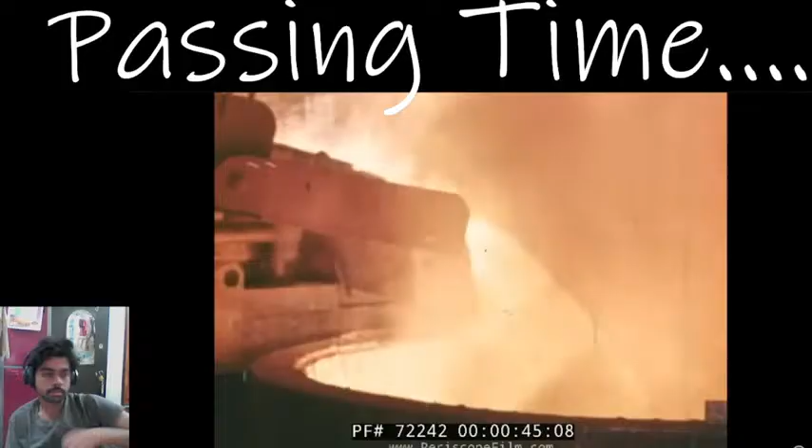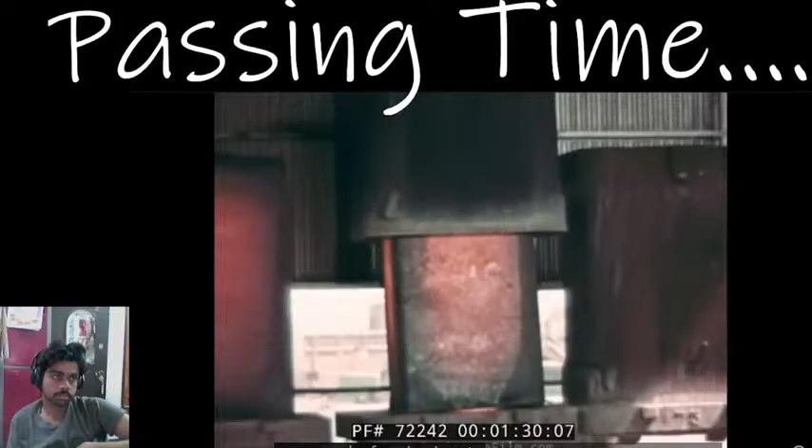The world's output of metal is more than 350 million tons a year. Almost all of it goes through a forming process. Metal forming means pressing, squeezing, or rolling metal into shape, as opposed to machining it. Forming depends on a basic property of metals, plasticity, the ability to change shape under pressure. By forming, ingots are changed into usable shapes. At the same time, the internal structure of the metal is altered.

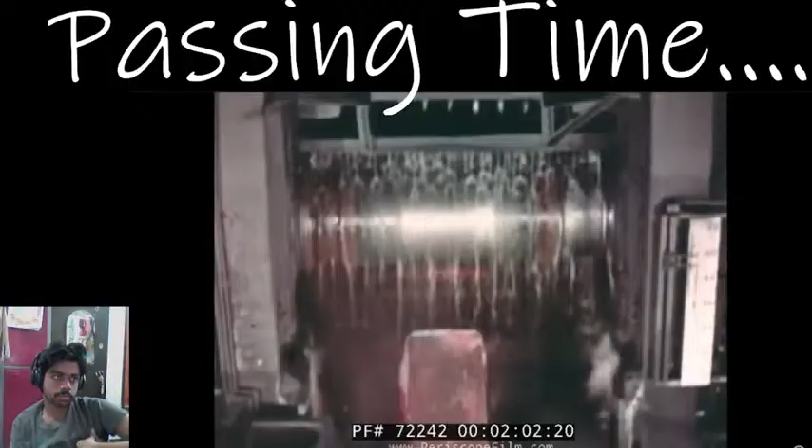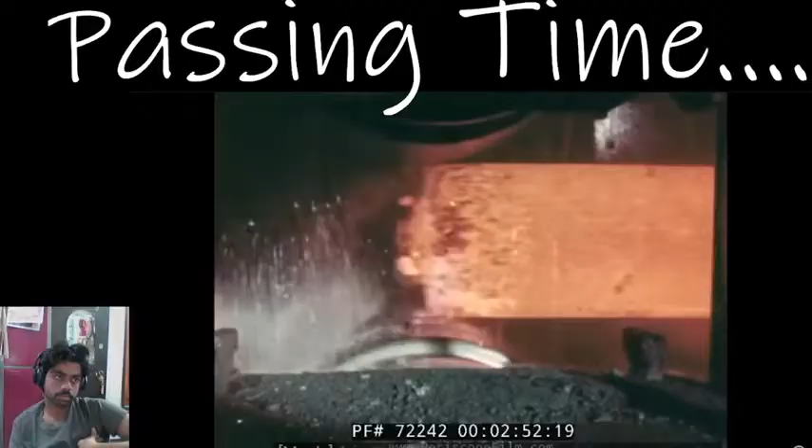As the rolls bite into the steel, the crystals are all the time breaking down and forming again, making the metal tougher and more resistant to failure. The slabbing mill is operated from a control room, the pulpit perched astride the rolling line. The mill is in continuous operation day and night. The chief operator and his assistants work 8-hour shifts. The operator gauges the thickness of the slab to a fraction of an inch. He sets the bite made by the work rolls. His controls direct the rams which manipulate 7,000 tons of steel every day.

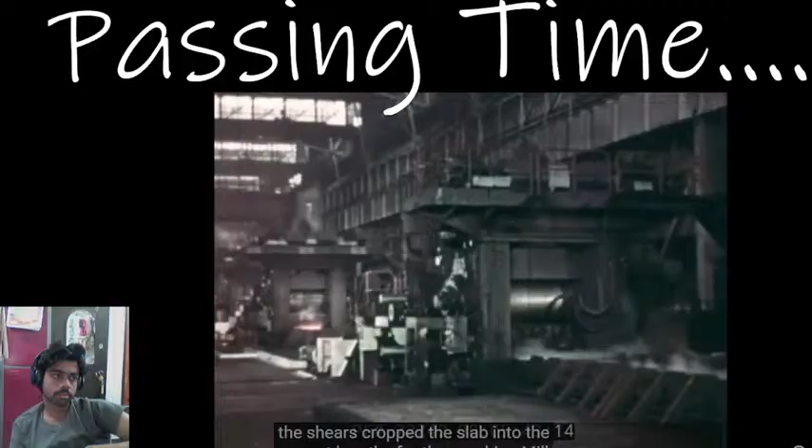When the ingot has been rolled down to a slab 8 inches thick, it is sent to the shears. The shears crop the slab into the correct lengths for the roughing mill, a group of 4-high mill stands in series.

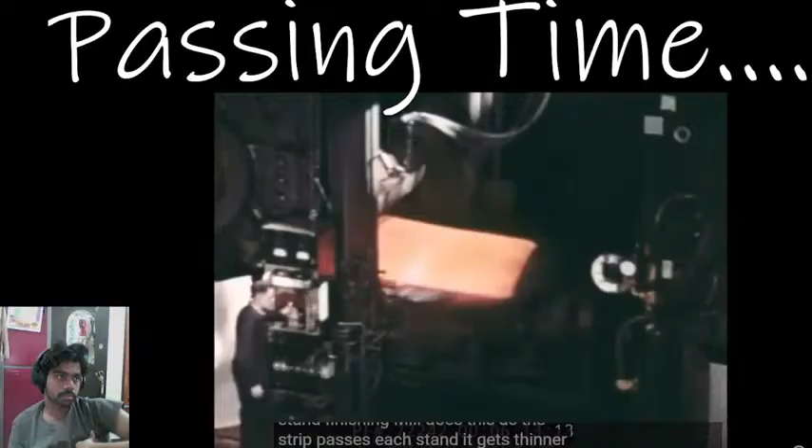The slab is now under an inch thick and is ready for rolling into strip. The 6-stand finishing mill does this. As the strip passes each stand, it gets thinner. It leaves the mill at 2,000 feet per minute, over 20 miles per hour. The strip hurtles down the runout table, cooled by jets of water as it goes.

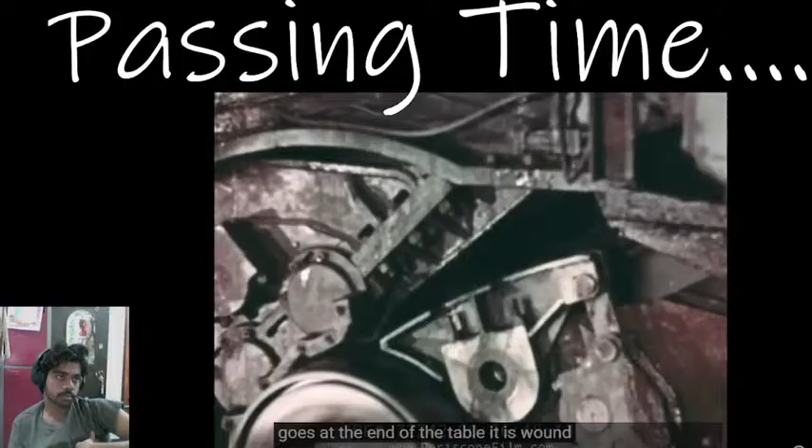At the end of the table, it is wound on a coiler. While one end is coiling, 400 feet away, the other end is still being reduced.

Rolling has given the strip a fine, regular grain structure. Its properties are better balanced. It is tougher now and more ductile. Such hot-rolled strip has many uses. For example, steel pipe for household gas and water is made from it.

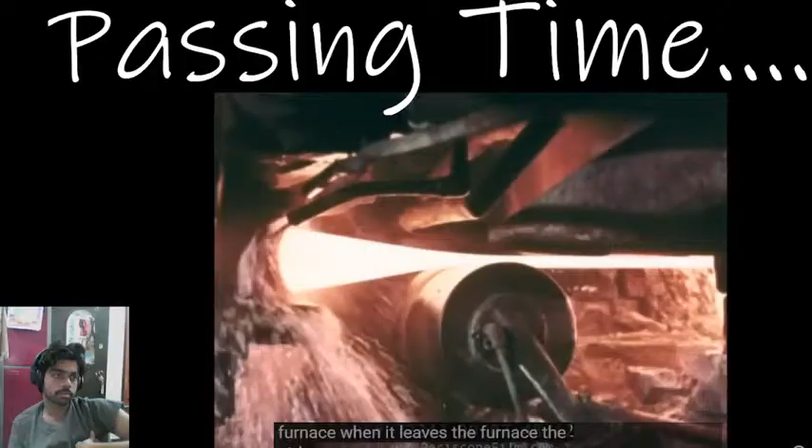Here it is being reheated in a tunnel furnace. When it leaves the furnace, the strip is bent into a tube by forming rolls. Further rolls press the edges of the tube tightly together for butt welding. The tube is cut into lengths by a flying saw, and the sections shoot away to a cooling rack.

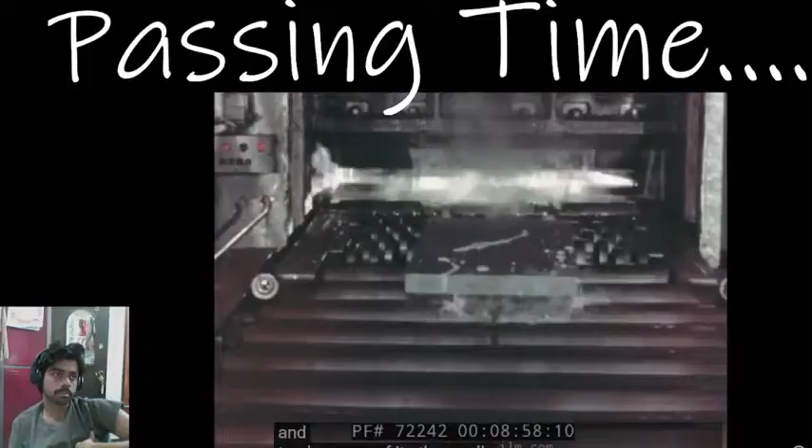As with steel, most non-ferrous metals are hot rolled. This is a slab of copper, just off red heat, and covered with a thin layer of scale. The slab passes between the bottom and middle rolls, and comes back between the middle and top. Because of its 3 rolls, this is called a 3-high mill. As a rule, hot working does not need lubricants because the metal scale prevents sticking. The work rolls are cooled by water.

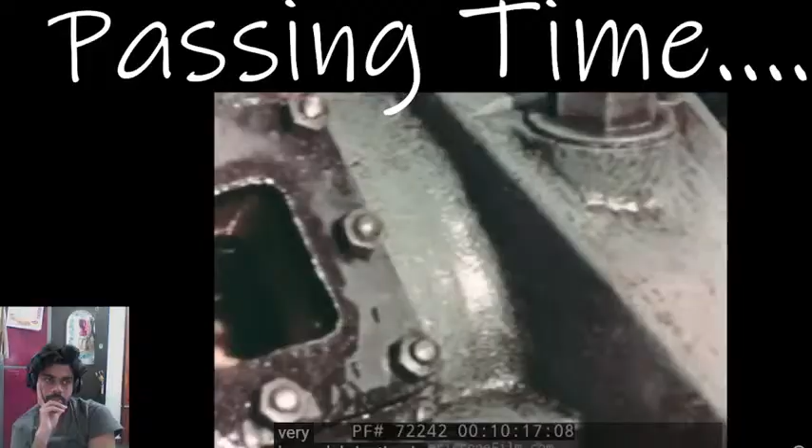In all metal forming processes, the loading on bearings and gears is very heavy. Lubrication is critical. Rolling mills are generally lubricated by oil circulating in a large system complete with coolers, filters, and storage tanks.

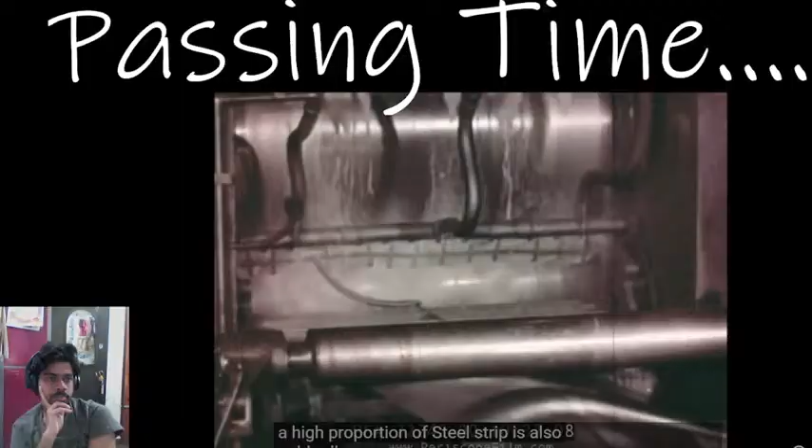A high proportion of steel strip is also cold rolled, using a dilute oil emulsion. Here, strip from the hot mill is passing forward through 3 mill stands in succession to be reduced to 1/30th of an inch, a common thickness for car bodies.

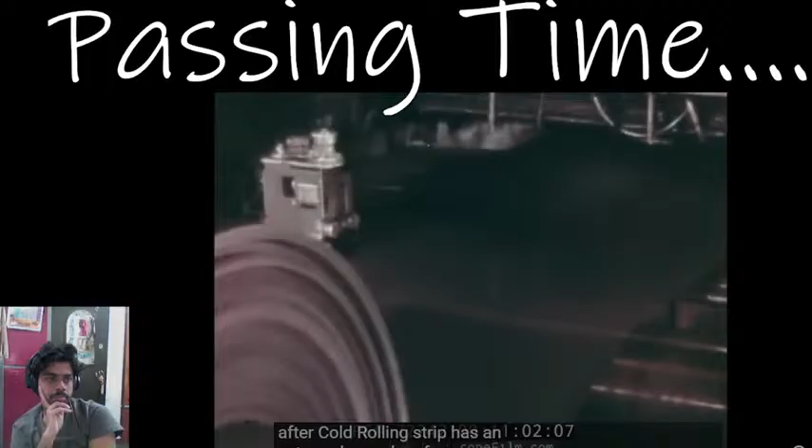After cold rolling, strip has an extremely good surface finish. But the regular grain structure it acquired in hot working has disappeared. The grains have been lengthened in the direction of rolling. The metal has become harder and stronger, but less ductile. Sometimes this is satisfactory, but sometimes the softness and ductility must be restored. This is done by annealing.

In one process, the metal is heated inside a container filled with an inert gas to prevent oxidation. This is known as bright annealing. Here the heating is done by gas or oil, and the whole process lasts for several hours.

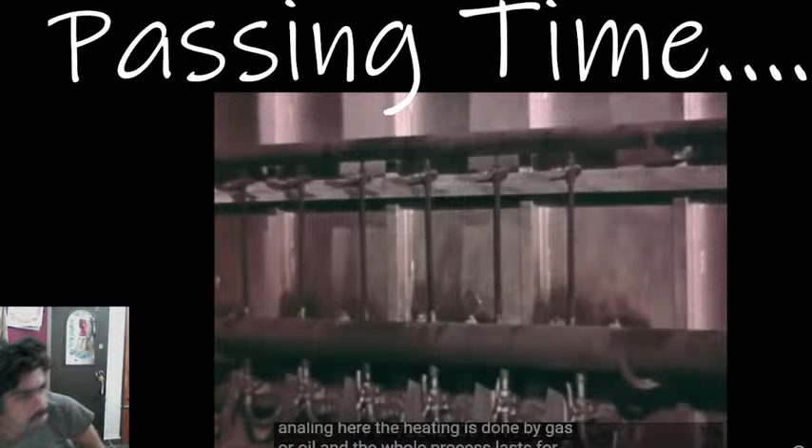Sometimes the softness and ductility must be restored. This is done by annealing. In one process, the metal is heated inside a container filled with an inert gas to prevent oxidation. This is known as bright annealing. Here the heating is done by gas or oil, and the whole process lasts for several hours.

Annealing recrystallizes the metal and restores its regular grain structure. Cold rolling followed by bright annealing gives much the same result as hot rolling, but with a better surface finish. After annealing, the strip can be worked more easily and is less liable to crack. In this tube mill, an oil emulsion lubricates and cools the strip as it is formed up into a tube.

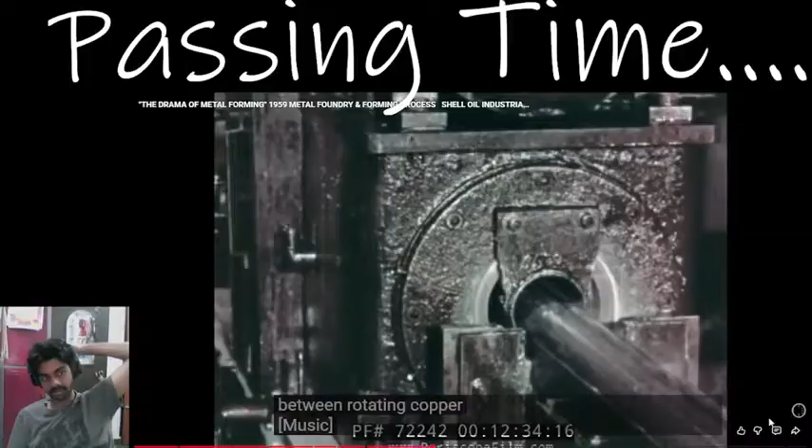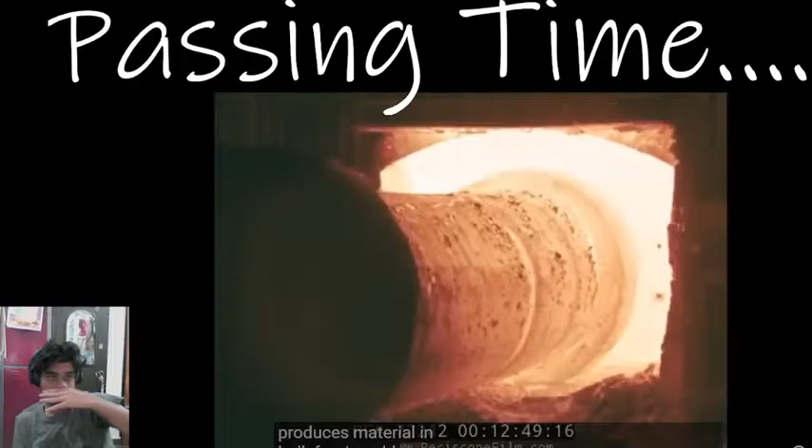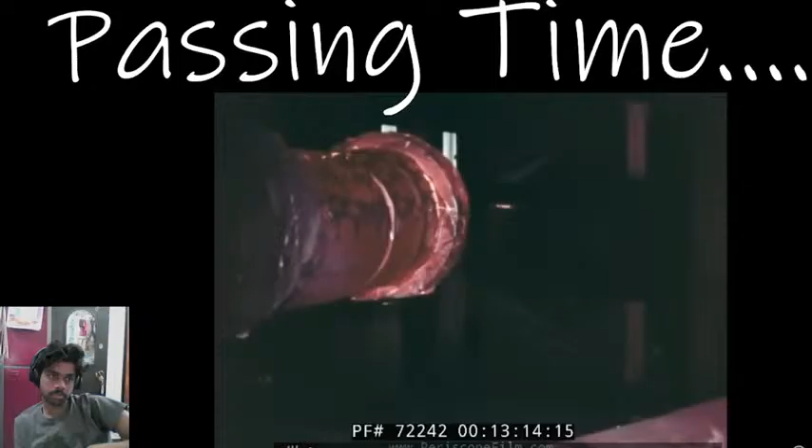Rolling, a continuous process, produces material in bulk. Forging, old as the blacksmith trade, remains unsurpassed for making individual parts, especially those of intricate shape or great size. By hammer or press, an almost finished article can be made directly from red-hot ingot or billet. This 170-ton mass of steel is to be forged into a turbo generator shaft. The 7,000-ton press squeezes the metal as much as 8 inches at a stroke.

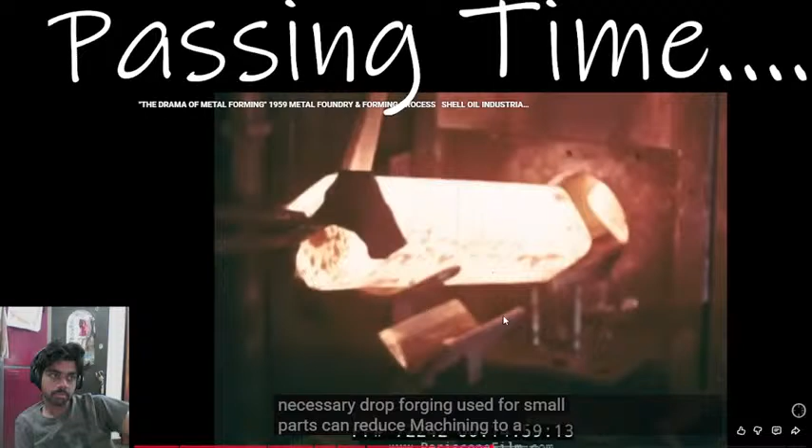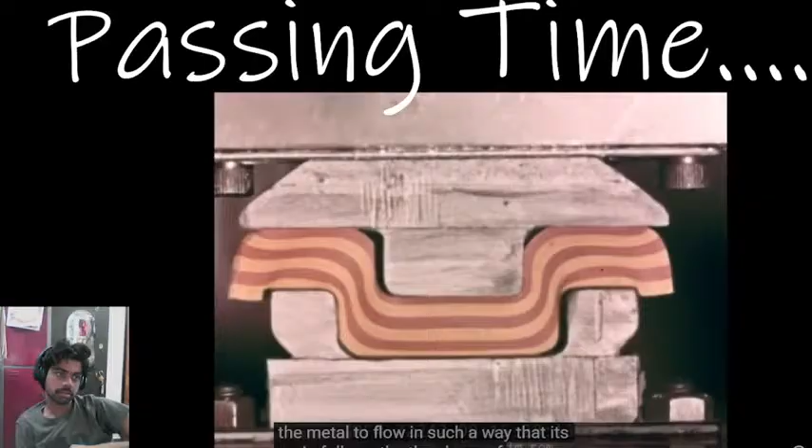The impact of the upper die causes the metal to flow in such a way that its grain follows the shape of the die. This gives the workpiece great toughness. After the roughing out, the crankshaft is put between finishing dies. Sawdust helps to prevent the metal sticking. When the flash has been cut off, the crankshaft will require very little machining. Fine and regular grain structure is an important asset of forgings. The forging of railway car wheels has been greatly speeded up in recent years by linking many forming processes into a continuous sequence.

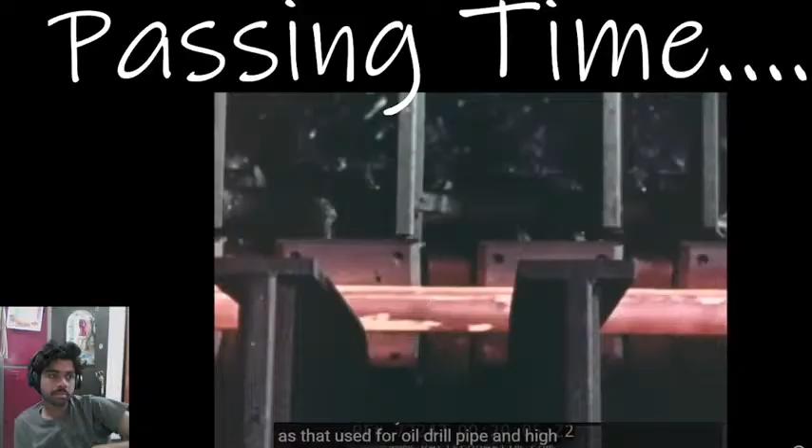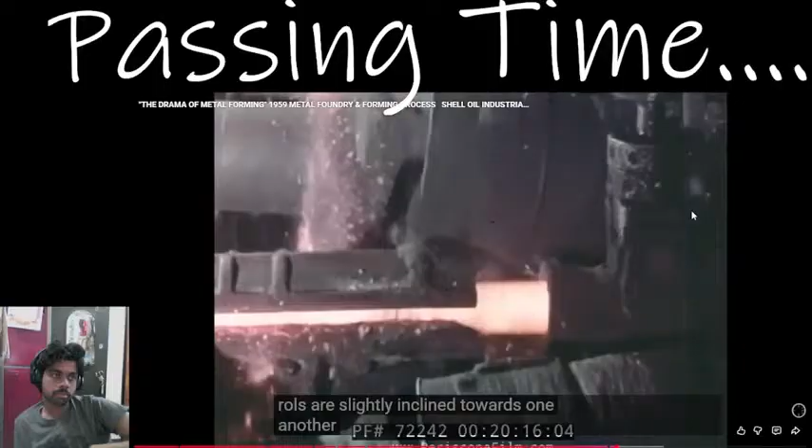In rotary piercing, the two piercing rolls are slightly inclined towards one another to break open the center of the ingot, which flows over the piercer held on a mandrel.

A cool piercer point is used for each ingot.

The piercer produces a thick-walled tube of medium length. This has to be elongated and its wall thickness reduced. This is done in the plug mill.

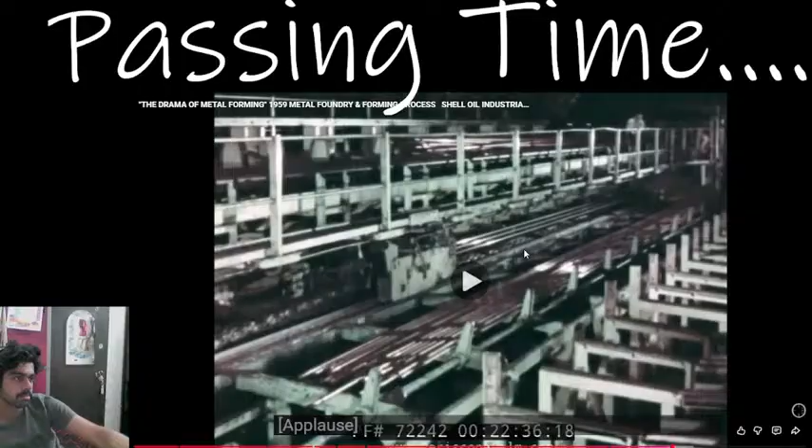For some small diameter tubes, the plug is not mounted on a mandrel, but is allowed to float in the tube.

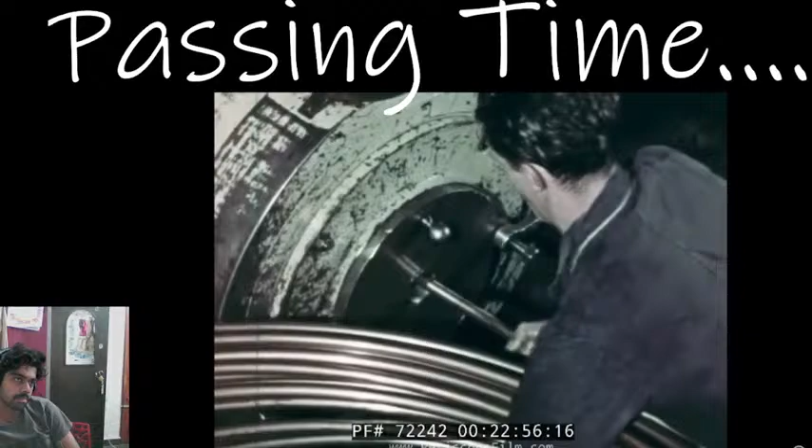The tube is pointed, or swaged, to allow it to pass through the die.

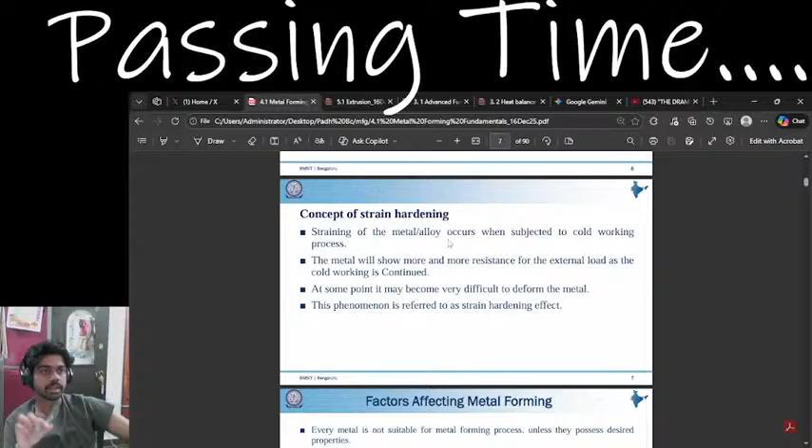Concept of strain hardening: straining of metals occurs when subject to cold working process. There are two types of working processes. The metal will show more and more resistance to the action of load as cold working continues. At some point, it may be very difficult to deform the metal. This phenomenon is referred to as the strain hardening effect.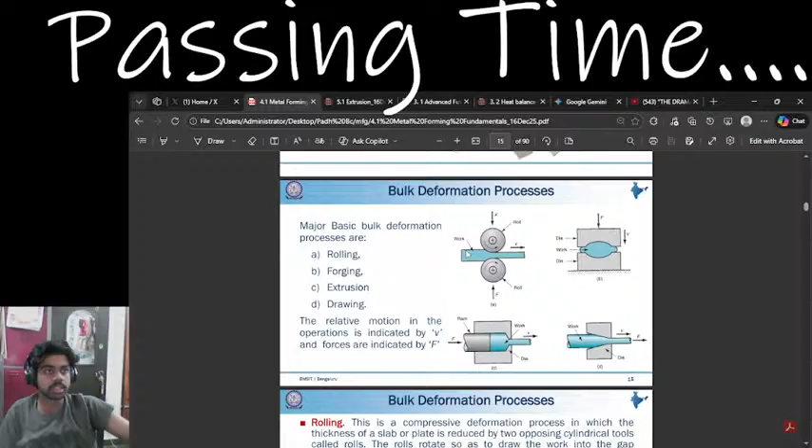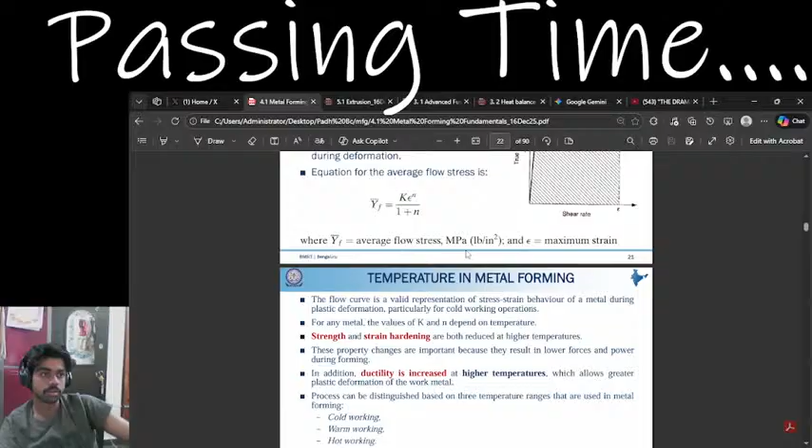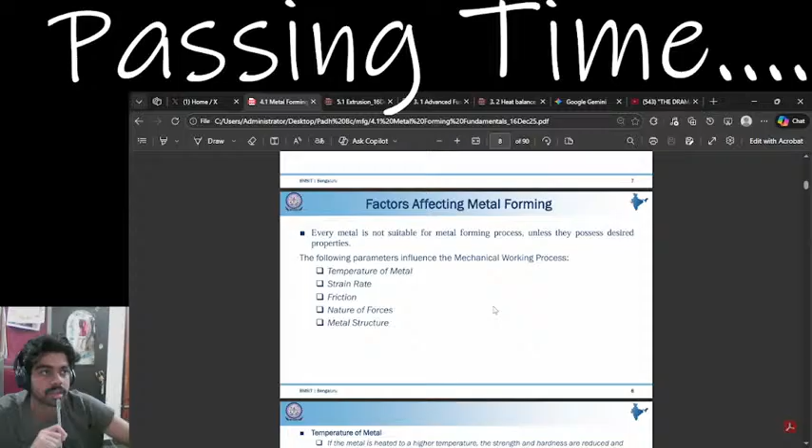Factors affecting metal forming: temperature, strain, strain rate, friction - nature of forces, metal structure. Every metal is not suitable for metal forming unless they possess desired properties. The following parameters influence the mechanical working processes. If the metal is heated to a higher temperature, the strength and hardness are reduced and the ductility is enhanced. The metal becomes softer and can be deformed easily.

Strain rate - strain rate is the rate at which strain is induced in the metal. As the strain rate increases, the metal becomes harder and flow stress increases. What is flow stress?

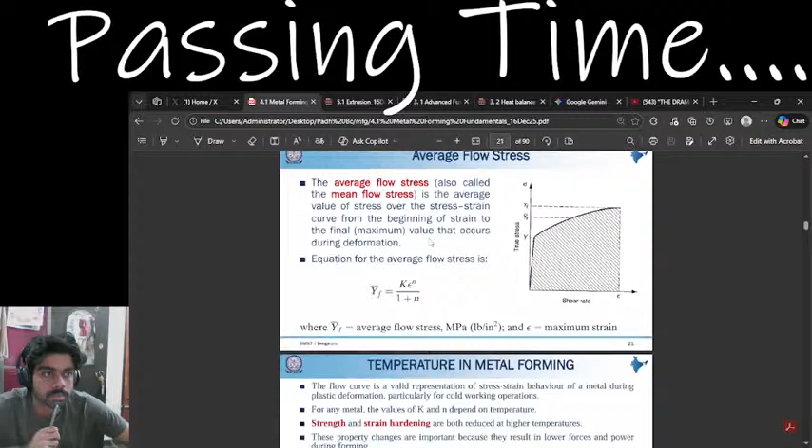Too many concepts to study. It's like a maze of things. Factors affecting metal forming.

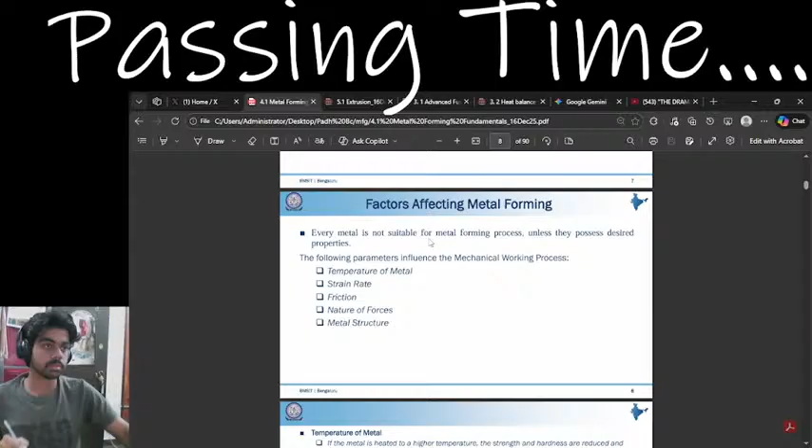Temperature of the metal. If the metal is heated to high temperature,

lower hardness, lower strength.

Stress and strain rate. Strain rate is the rate at which strain is induced in the metal. As strain rate increases, the metal becomes harder and flow stress increases as the strain hardening in the metal increases. Strain hardening is a phenomena, as I already mentioned, where metal subjected to cold working process will show more resistance for the external load.

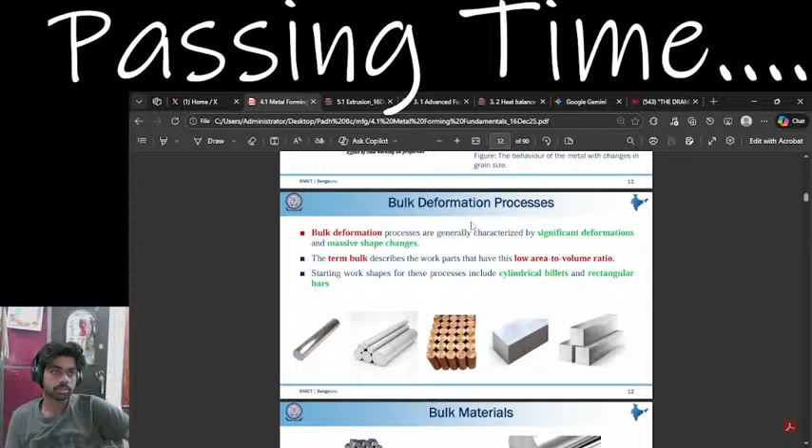Bulk deformation process is generally characterized by significant deformations and massive shape changes. The term bulk describes the work parts that have low area to volume ratio. Starting work shapes for these include cylindrical billets, rectangular bars, etc.

Bulk deformation, why is it always rolling?

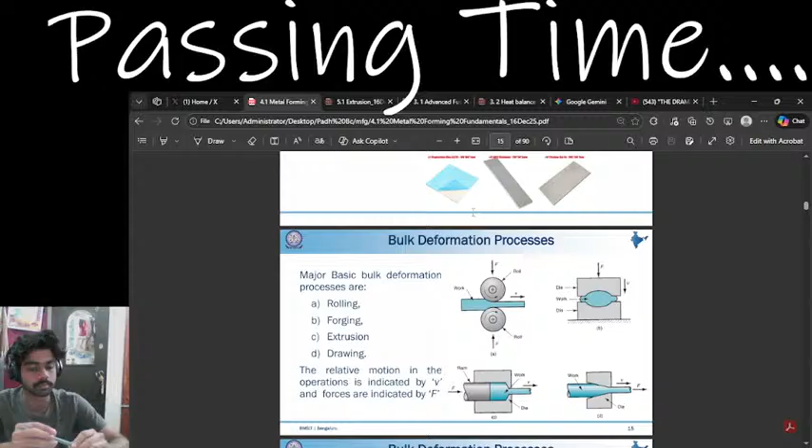Bulk deformation process, rolling. Rolling is a compressive process in which the thickness of the slab or plate is reduced by two opposing cylindrical tools called rolls. The rolls rotate so that

Opposing cylindrical. In forging, a workpiece is compressed between two opposing dies. Forging is traditionally a hot working process, but many types of forging are performed cold.

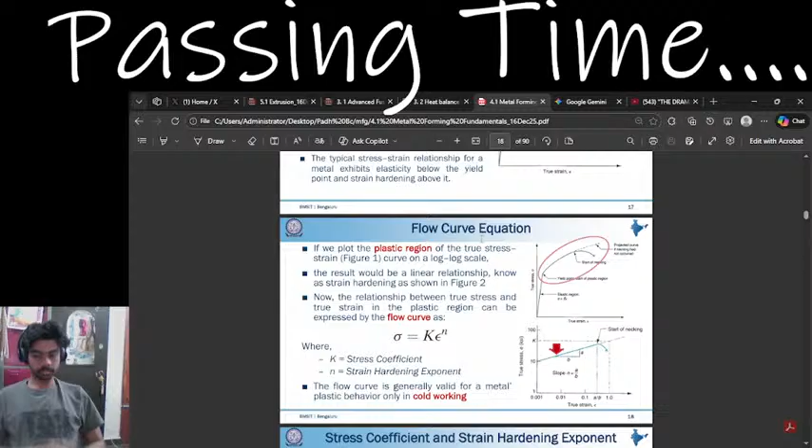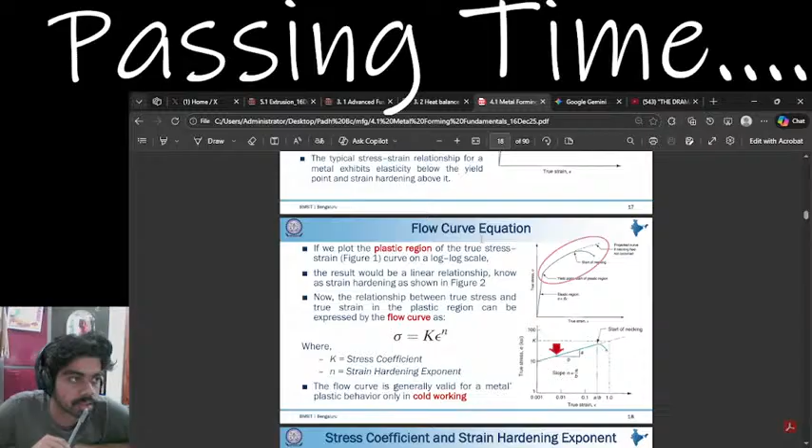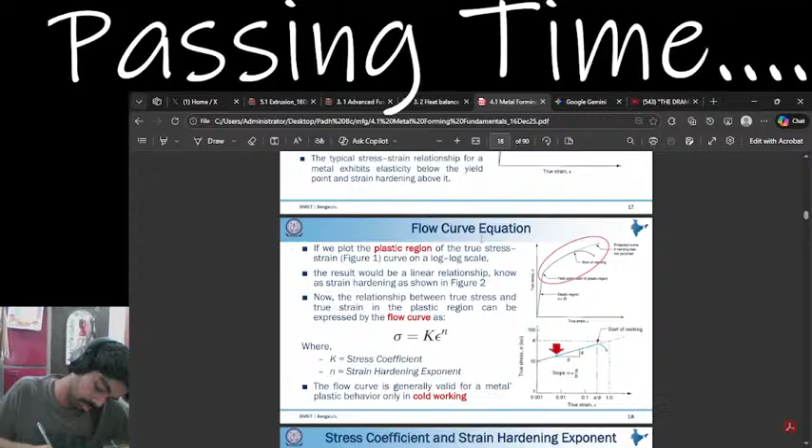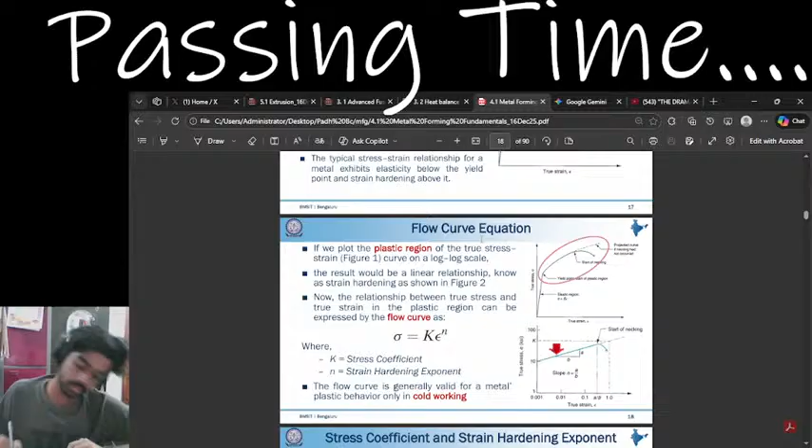now the relationship between true stress and true strain in the plastic region can be expressed in the following flow curve: sigma is equal to K epsilon to the power n. The flow curve is generally valid for metals in the plastic region only in cold working.

The reason the flow curve equation is generally valid only in cold working comes down to strain hardening. The equation mathematically describes strain hardening, also known as work hardening: as you deform the metal, the strength goes up. In cold working, that's exactly what happens. You bend a paper clip and it gets harder to bend further.

Hot working erases the hardening. In hot working, the metal behaves differently: self-healing recrystallization. Okay. Flow stress, average flow stress. Temperature in metal forming.

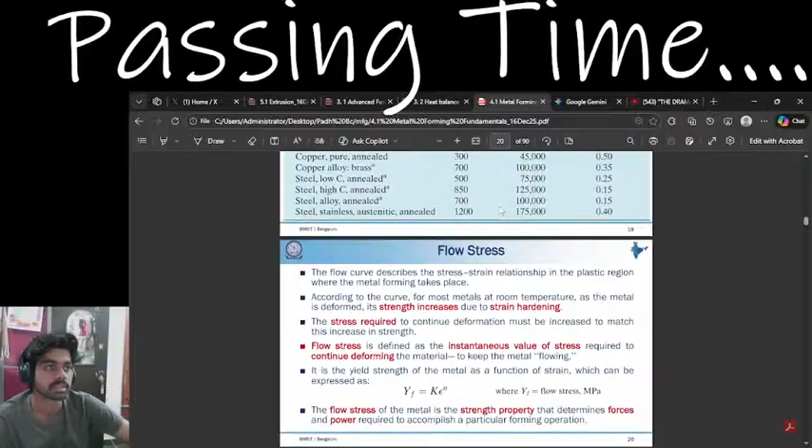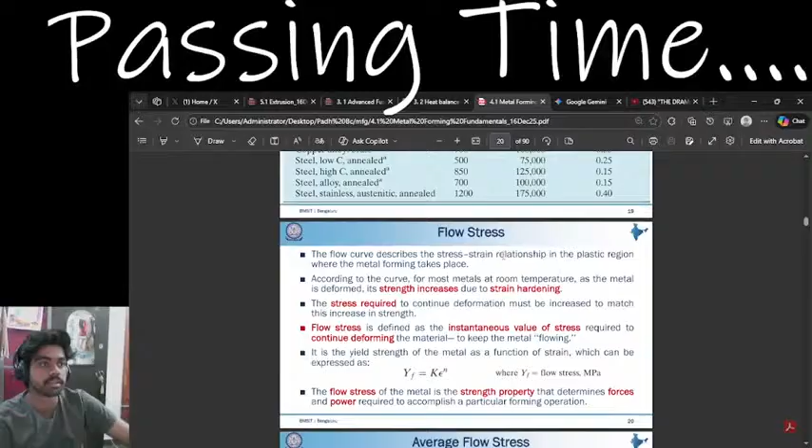Average flow stress is the average value of stress over the flow. The temperature at which the deformation takes place will be an important determining factor. The temperature is relatively low with respect to the melting point. Strain hardening is a phenomenon whereby a ductile material becomes harder and stronger as it is plastically deformed. Sometimes it's also called work hardening. Significant advantages of cold forming.

I welcome you all in this presentation related with the subject fundamentals of manufacturing processes. We have talked about the casting based processes, and today onwards we will be talking about the metal working processes for manufacturing of metallic components. So these are basically the plastic deformation based processes.

Means in this group of the processes, basically the desired size and the shape is achieved by applying the force to the metal or the bulk material, so that required deformation is achieved, and the plastic deformation of the material results in the shape which is desired.

Like say this is the strip, and if you want the strip of the smaller thickness but of the greater length, then by applying the processes like rolling or extrusion, this kind of shape can be changed, but this will primarily be based on the plastic deformation.

So for achieving the plastic deformation, we need to apply the force so that the stresses acting on the metal are greater than the yield stress of the metal which is being processed. So using the external forces, basically the metal is plastically deformed so that the desired size and shape is achieved in metal working based processes.

So here the common names of the processes which fall in this category are like rolling, forging, extrusion, drawing. So these are the most common plastic deformation based processes which are used for the different purposes. For example, the drawing is used for making the wires and the bars, while others are used for making the complicated shapes.

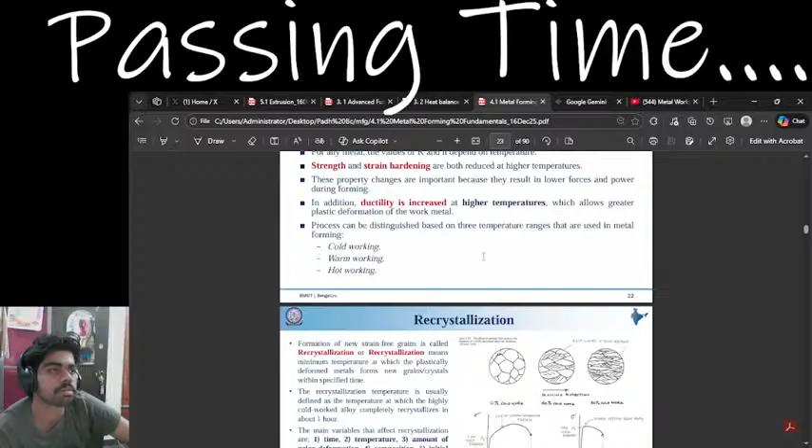So these are based on the atomic movement, the direction of the force or application of the force. So the force is applied to cause the plastic deformation. So as per the direction in which force is being applied, the metal will be flowing to facilitate the plastic deformation. So when the metal flows during the plastic deformation, the crystals will be orienting

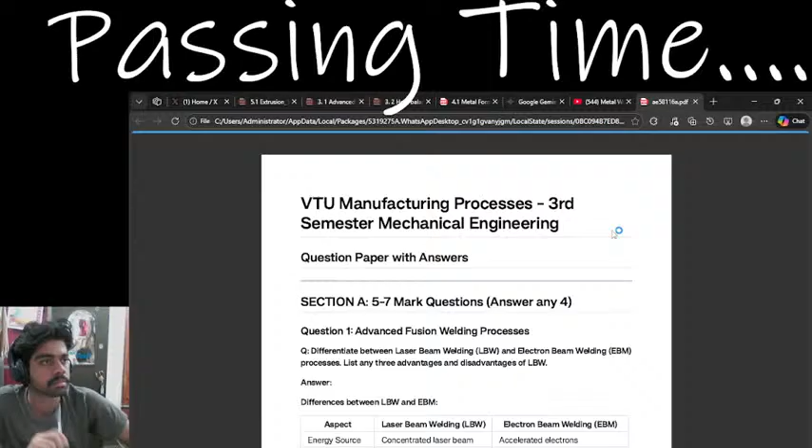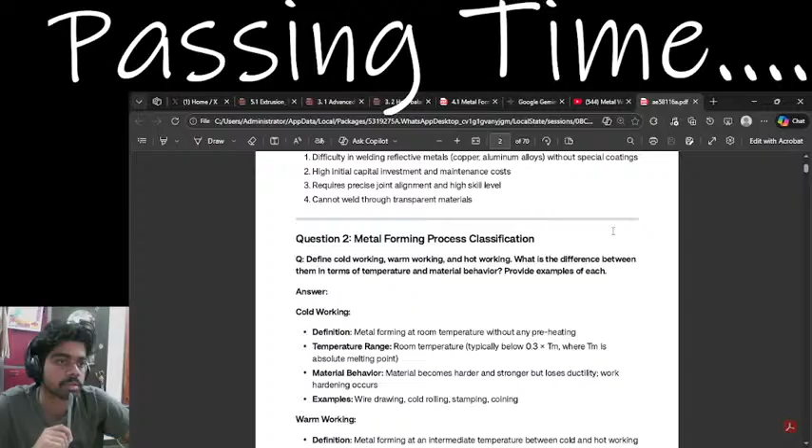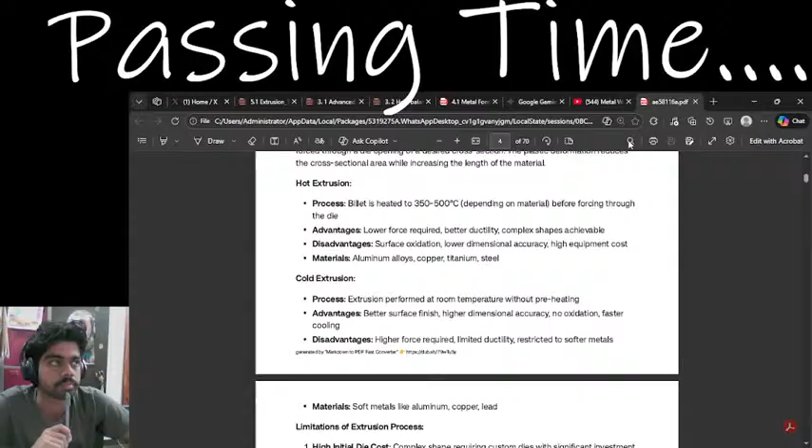Damn, we got a study material. This is probably about all the questions that we asked. I feel a little overwhelmed right now. I think I need to stop studying at this point. I'll come back a little later.